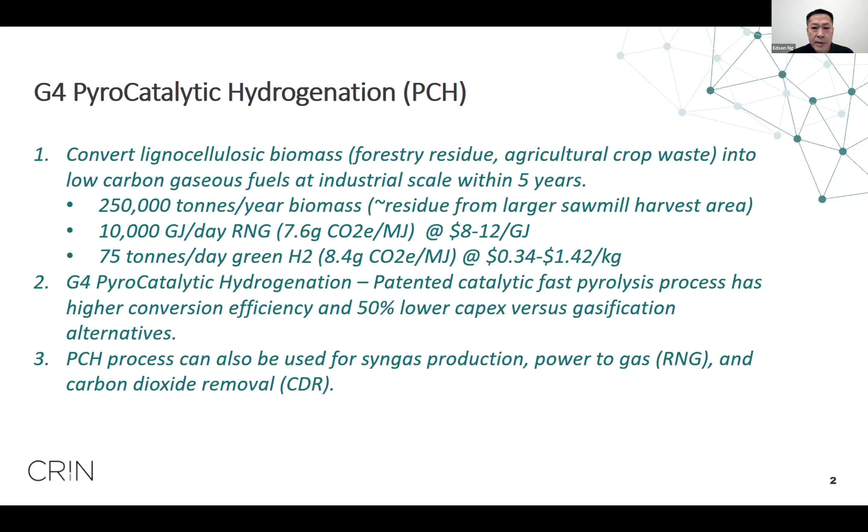The process is to hammer mill waste fibers, like from forestry harvesting. That goes through a fast pyrolysis step, which creates pyrolysis gas. We add hydrogen, and the combination of pyrolysis gas and hydrogen goes across commercially available catalysts, which converts those gases into methane and water. We drop the water out, purify the methane, and that produces renewable natural gas - over 98% methane with remaining hydrogen that can go to the grid as RNG. To make the added hydrogen, we take a portion of the methane we're making and put it through a standard steam methane reformer.

And that creates a syngas, which could be a product in itself, or purified to produce the hydrogen we need internally. In that purification step, there's an opportunity to capture the CO2, which is pressurized and purified for CO2 sequestration or downstream uses.

In the pyrolysis step, most of it is going to gas, but we can actually have a biochar fraction left over that can be used as fuel for the burner in the steam methane reformer, or we can configure the system to produce more biochar, which can be used for carbon dioxide removal or CDR credits, which are very valuable in the current market.

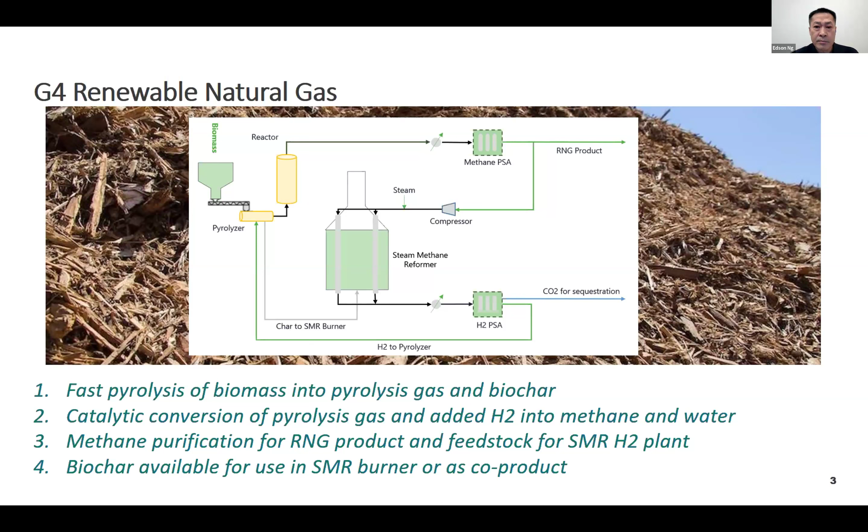If we want to make green hydrogen, you'll notice the process blocks are identical because the technology is exactly the same. What we do instead is take all of the methane produced and put it through a larger steam methane reformer, giving us net green hydrogen output.

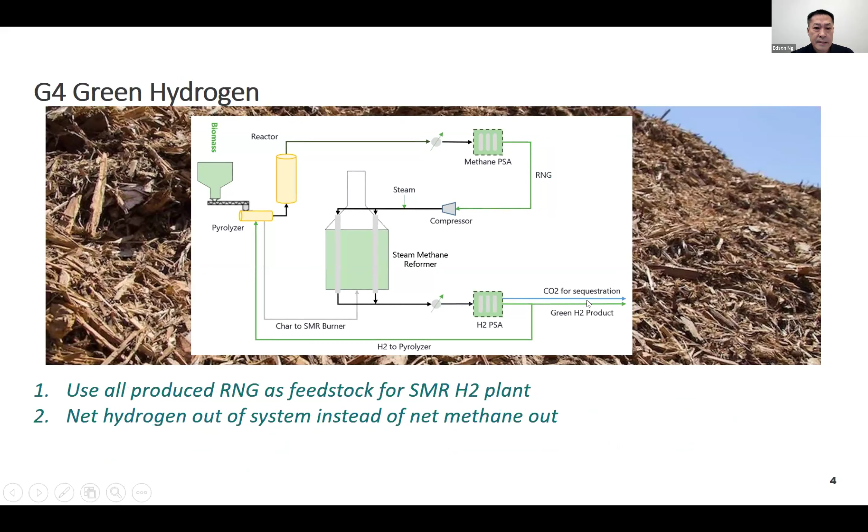The progress to date is that over the last 15 years, we've conducted some very high-profile demonstration projects. The first major one was with the California Energy Commission, where we took forestry waste from the California area, produced renewable natural gas, compressed it, and ran it in an unmodified CNG vehicle.

In 2019, we completed an end-to-end demonstration of continuous production of RNG and injected that gas into the ATCO gas grid at both facilities. The illustration in the middle is our current project, the reactor, which is one of 30 subsystems. This is the one we want intermediate data points for before scaling up to a full commercial plant. That's the current project being funded by CRIN and other partners.

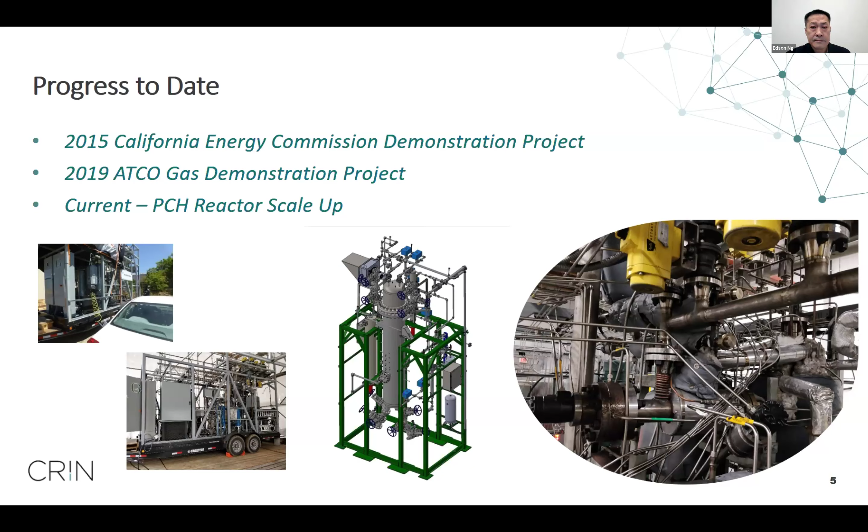Some of the challenges we've encountered is that we find ourselves in a very unique space. On one hand, there's very strong demand for commercial offtake agreements for RNG supply from gas utilities, very high interest from renewable project developers, and lots of money available whether it's wind or solar. Renewable fuels is a hot topic, so there's a lot of money waiting to be deployed, and we've had very strong natural gas industry support, whether it's the NGIF or other players. Great support from that community.

The challenging part is that we're in that space where forestry companies, which is our feedstock side, are generally risk-averse, or if they have some in-house activity, it's going to be focused on their own in-house technologies as opposed to working with a third party or a non-university, as an example. Natural gas utilities are generally risk-averse. They're interested in offtake agreements, but generally don't invest in pre-commercial technologies—it's part of the mandate as a gas utility.

And finally, the VC space—this is difficult for them because it's relatively high capex in the early phases and much longer time to exit, so it's not a good fit for VCs in general. So our focus has been to work with industry and government to get the partnerships and supporting funding to move our projects forward through some of the projects we've talked about so far, and we'll continue to use that route as our primary way of moving forward.

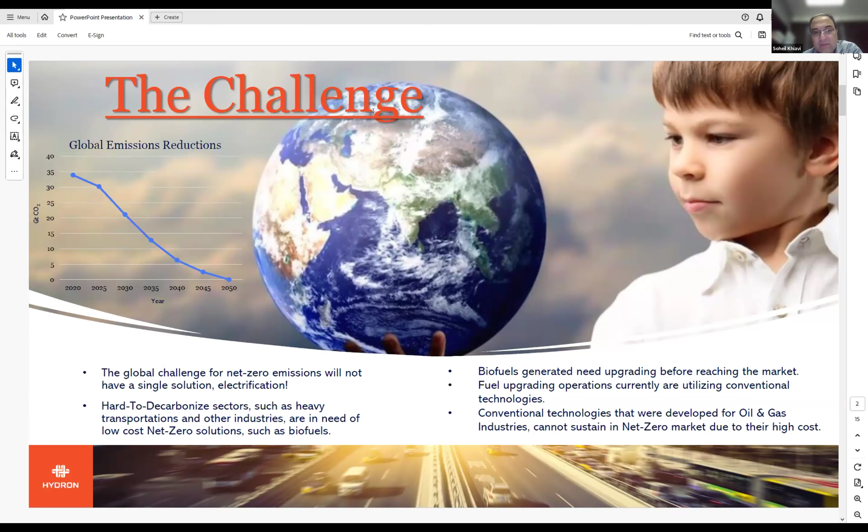So the solution that we have, Hydron, follows or mimics nature. We believe nature is a brilliant designer and builder with zero waste. There is no waste in nature. The only waste is actually made by human beings, most of all the waste on our planet. If you look at seashells, silk fibers, these are examples. Everybody knows we are still trying to match some of the properties of these gifts from nature.

And if you look at advanced solutions provided for us by nature, we are here talking, and we actually have an air separation unit and a carbon capture unit running in our bodies. We take air and separate oxygen using hemoglobin, and also use anhydrase to remove carbon dioxide and then exhale it. These are the most efficient means of doing these separations. Compare that with an air separation unit done at cryogenic temperatures, or CO2 separation using pressure swing adsorption membranes. You're not walking around with a backpack boiler or a compressor hooked up to you to work.

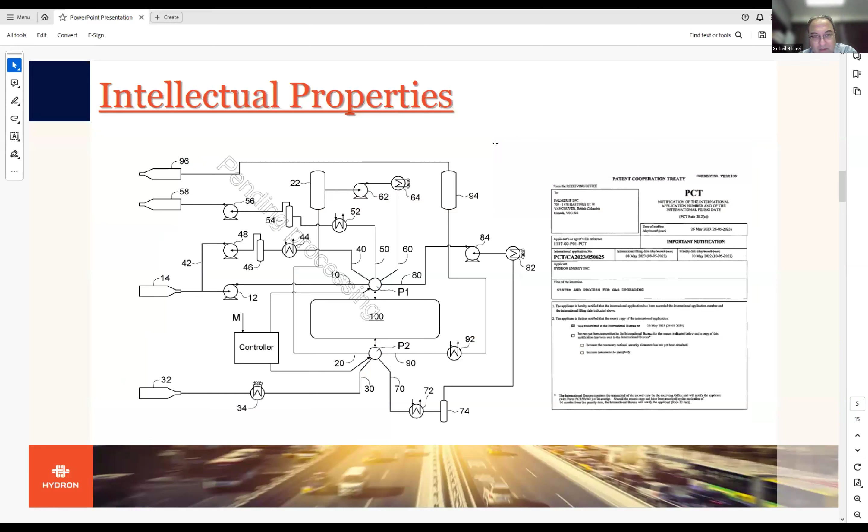Your hemoglobin goes through full regeneration, grabs iron 2, goes from iron 2 to iron 3, grabs the oxygen, and then releases it. Same thing with the anhydrase group. So it goes through full regeneration, meaning you don't have buildup of contaminants, but also the material is fully selective for that particular species we are designing for. For instance, if we design it to capture carbon dioxide, it will have zero affinity to methane. Hence our recovery is near 100%. These are the things we've proved in the lab and in the field also.

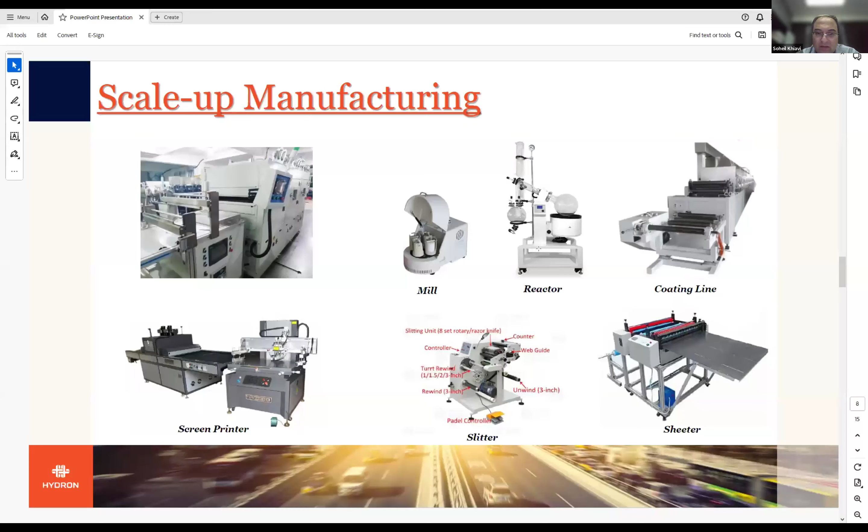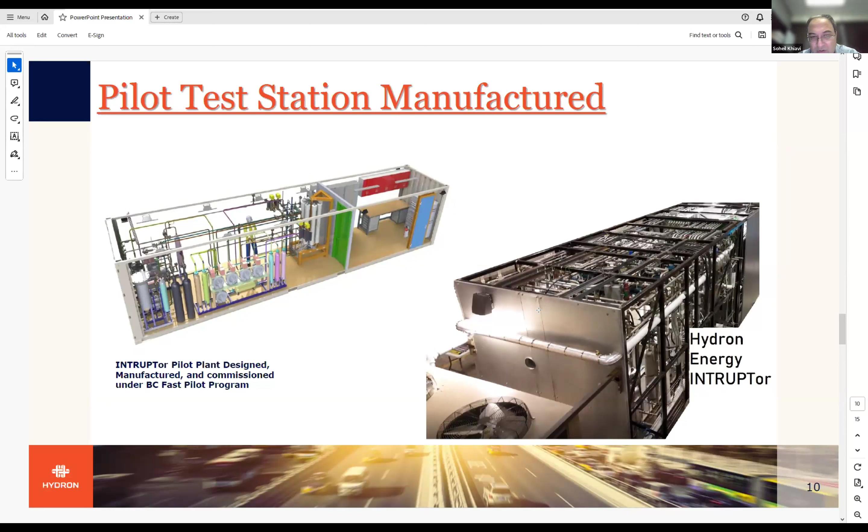The actual unit is on wheels. I want to go back to the original picture to show you that this is sitting on a gooseneck and can actually be towed with a ton truck. It's quite lightweight also - of course, you need to empty the chillers, but...

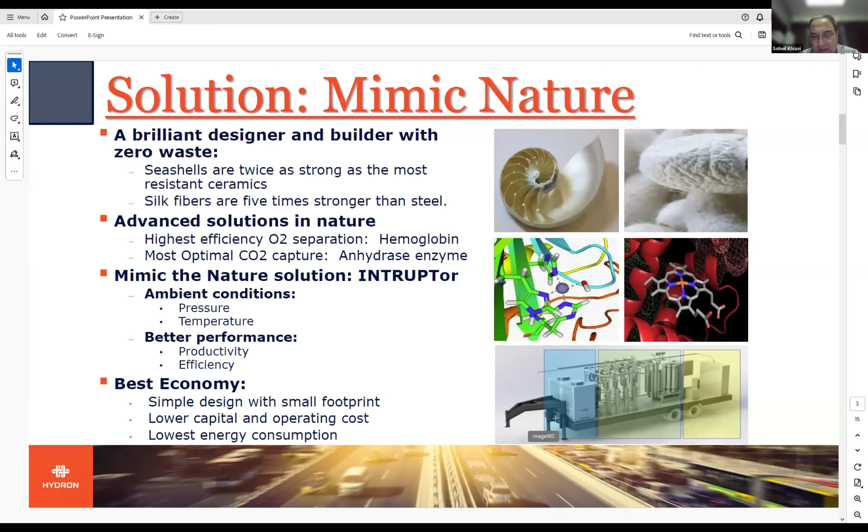The advantage of this technology is that it can be made mobile. It's very light - you can see the core passage contactors, they are very lightweight. We are not using pressure to operate this. Everything is made of composite material, with a carbon fiber casing around it and fiberglass around that. It doesn't require high pressure, only fans and blowers.

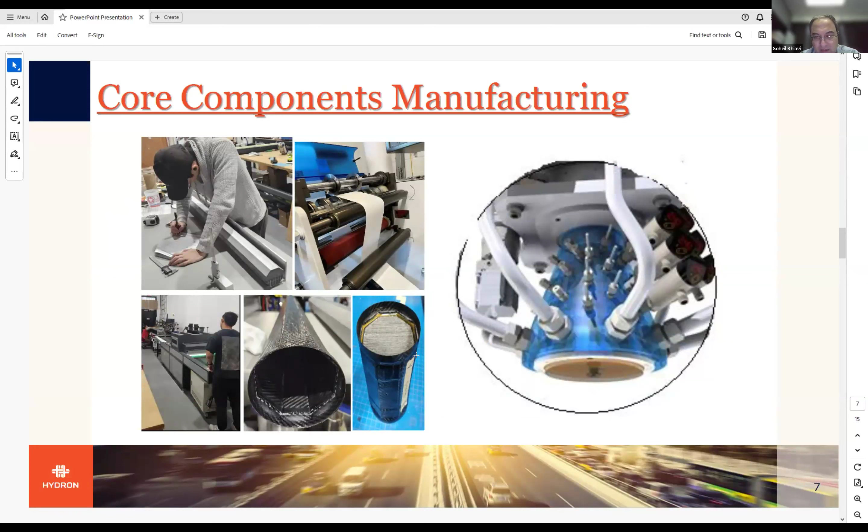So once the separation is done, then we compress the natural gas, or hydrogen. That way you reduce the compression energy by half.

So this is the unit, and this is the gooseneck. The unit is complete and was transferred here on the gooseneck. This is off the factory.

So this project, it's about 2.5 years that we've been working on, and we started with IRAP and BC Innovate. Then CIC took the lead in funding us on this project. Now we also have NGIF and CRIN joining the scale-up program, where we're going 10 times larger than this.

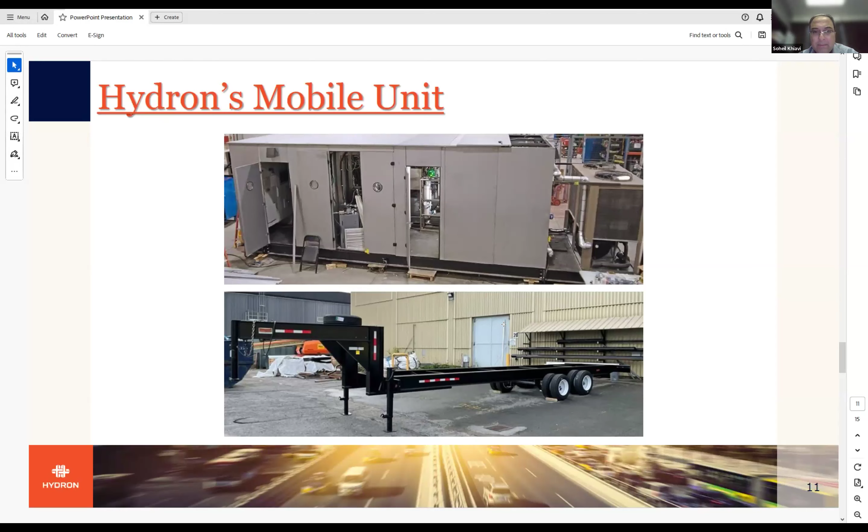Our commercialization roadmap - I want to show you we started in December 2021, and we did our FAT testing back in December, and the demo basically starts this month, February.

And I'm going to give you about a minute to wrap here. Thanks, no problem. I want to keep on time.

So we did our third-party TEA, and we already have 2 purchase orders for this unit. We received the purchase orders, and we're going to do the first unit manufactured by March, and then the next one by August. 5 units are booked to be sold this year.

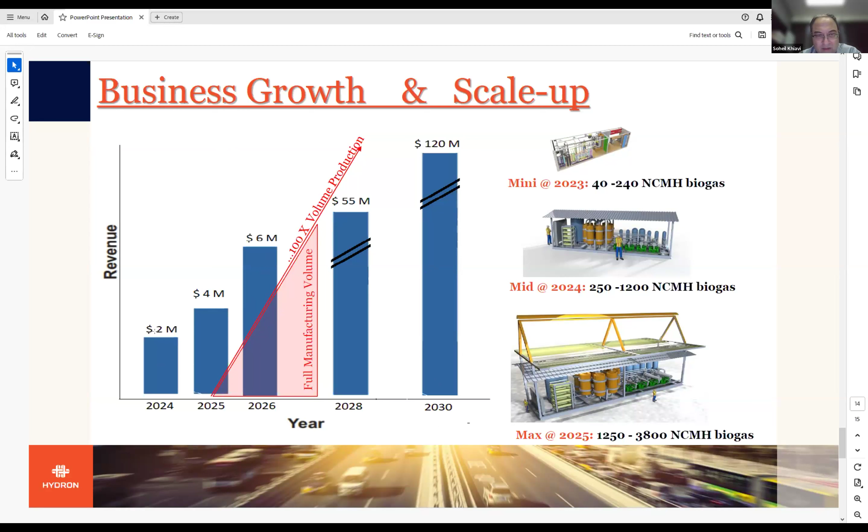The next stage, I'm basically raising more money for the company for the next round to do a 100 times volume production increase in our facility, so we can move to a new facility and increase our volume production by 100 times, so we can increase our sales from 2-4-6 million up to 120 million. There's enough room to go there.

And this concludes my presentation. I want to thank the CIC and all other partners that helped us in this project. Thank you for listening - if you have any questions, we're happy to listen.

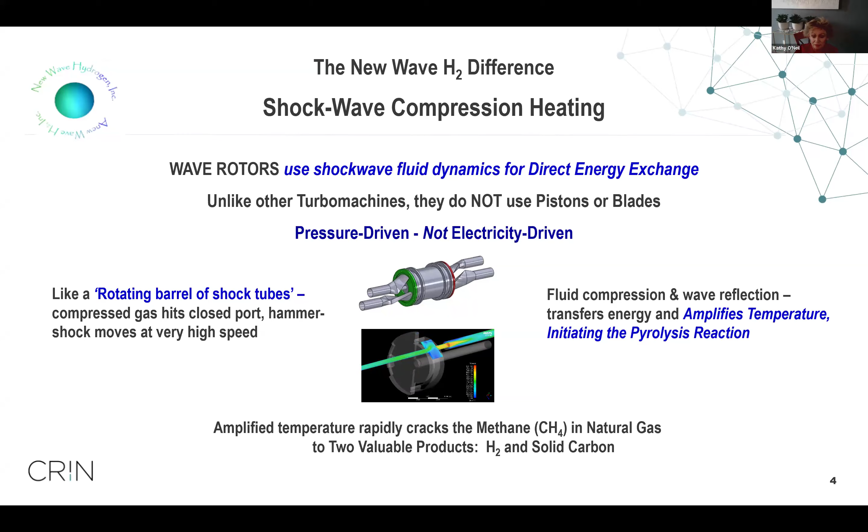We are very fortunate to have tremendous global partnerships and co-funders: CRIN, NRCan, Alberta Innovates, ERA, and NGIF, GRT Gas in Europe, and many outstanding universities and engineering groups that we've been working with. We've also been fortunate in that from the very beginning of our company, just a few years ago, we've had multiple grants each year: 3 grants from 2019 to 2021, 3 more in 2022 to 23, and a new one already in 2024.

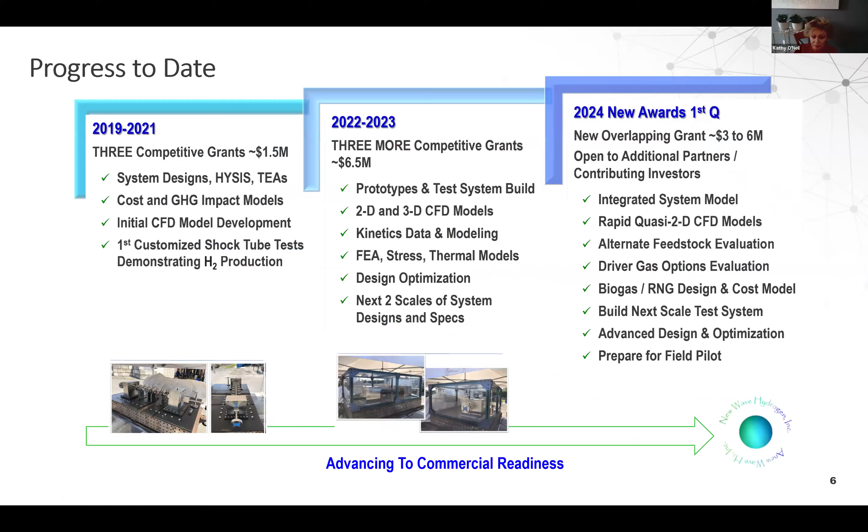So this new grant actually opens up an interesting collaboration opportunity. If there are any industry partners or investors out there that are interested, it's excellent timing with this new grant. Between our current projects and our new grant, we have at least $6 million in match that we can offer. And the timing is perfect in terms of our scope.

This is the scope for our current projects. We're able to take an industry partner's site as a case study and work through the design optimization, preparing engineering designs, techno-economic analyses, all the way through a short-term field pilot. So for industry partners that join now, we could potentially use your specific site or sector as this case study and accelerate you to commercial pilot.

And challenges—have we encountered challenges? Absolutely. It's been an amazing few years. And what have we learned? Mostly perseverance—it's really what it takes. So it's been an interesting ride, but tremendous. We have a tremendous team; we wouldn't have made it without them.

We're also looking at the integration of hydrogen in agriculture, as actually the last two presenters are as well. So we're working with a group right now to explore the conversion of biogas into hydrogen at their site. We're also looking at virtually every market associated with hydrogen in the long run, from using natural gas and reforming it to hydrogen, to biogas, creating clean hydrogen to produce ammonia, and vice versa.

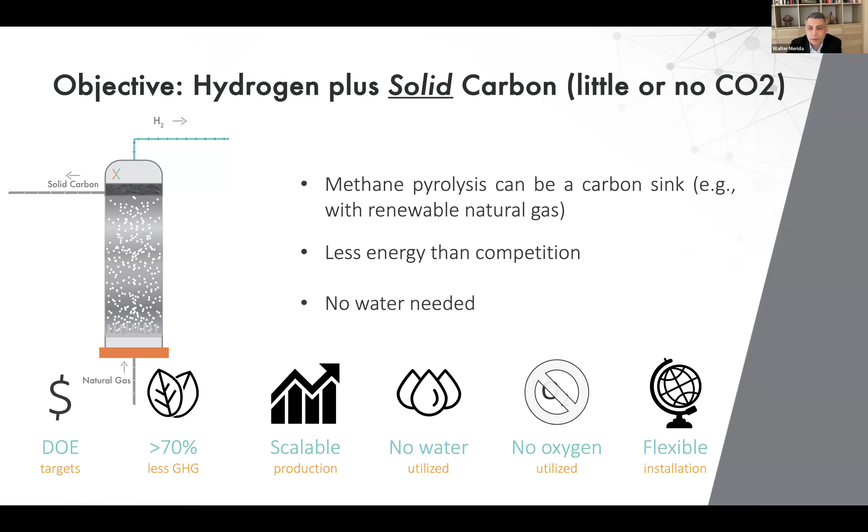In terms of the progress, we had been thinking about the idea for a while, but we didn't really start working on this until 2021. We got a couple of funding grants to develop the pilot plant. And it has been overall an investment of about $10 million, including the research work, to go from lab prototype to the pilot plant in Alberta. And the challenges: it is one thing to build a lab prototype in the lab, and it is a very different thing to build a pilot plant and get all the permits, engineering, contracting, and so on done. But we have successfully managed to go through those obstacles.

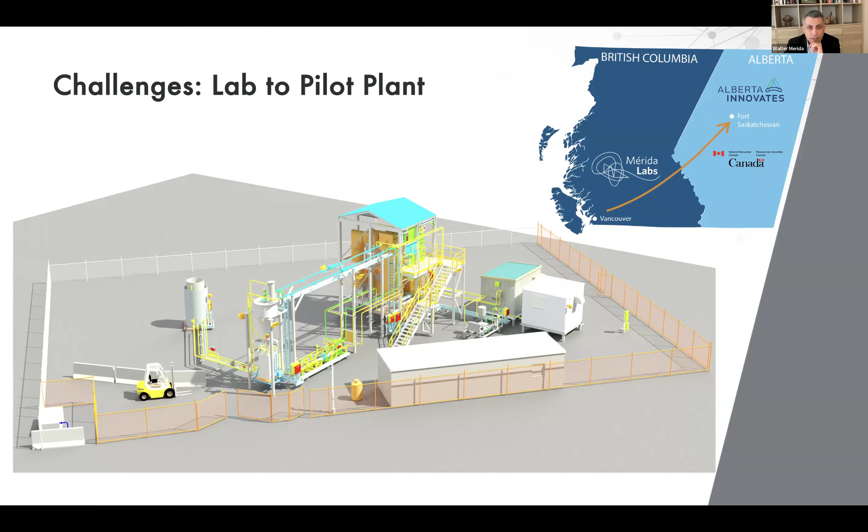This is a rendering of the design of the pilot plant that we have prepared. And this is the existing plant that is currently being commissioned in Fort Saskatchewan. Some of the challenges were, of course, the permitting and contracting, but others were simply the fact that we had to commission the plant in minus 40 degrees Celsius temperatures. While that was a challenge, it also demonstrated that the technology is robust enough, even at this pilot scale, to be operational under those conditions.

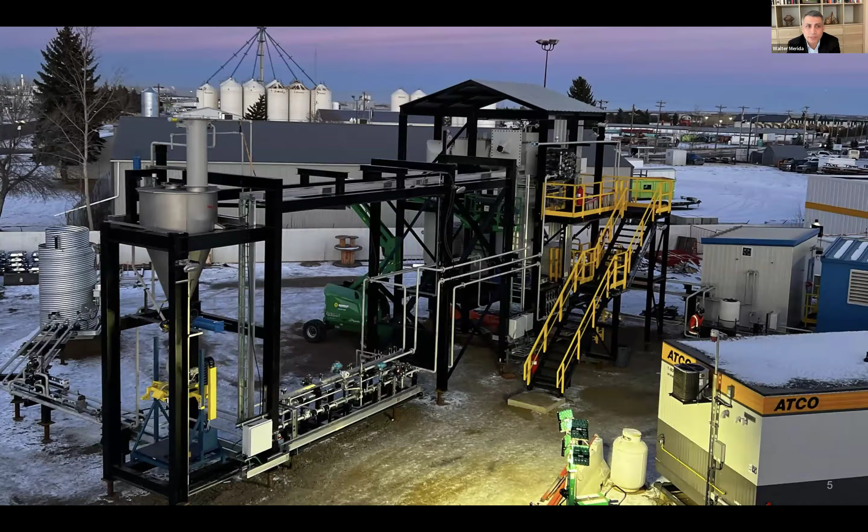In terms of the next steps, we are looking for partners. We are commissioning the pilot plant, and we would like to look at building the next plant in the 1 to 10 ton per day range.